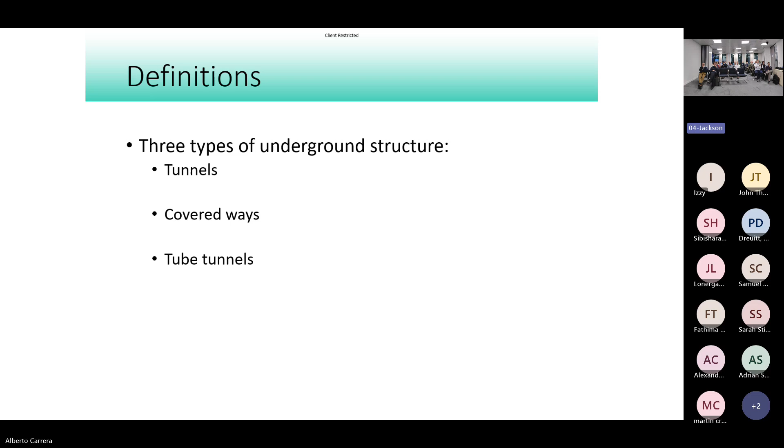There are also tunnels and covered ways that you'll find on the shallow tube - I'm not going to call it the tube, it's the underground for those bits. They're not tube tunnels, I don't care if they call it the tube as their brand, I'm going to be engineering correct here. We've got 3 types: tunnels just below the ground that have been bored, mined out without disturbing the surface. The majority of the subsurface parts of the underground - the Met, Hammersmith and City, Circle and District lines - are built as covered ways, which I'll explain again in a moment. And then the rest is tube tunnels, deep level circular tunnels, mostly cut out of London's clay.

So here's where it all began, back to 1825. Marc Brunel, father of Isambard Kingdom Brunel, who probably eclipsed him to an extent, created the very first tunnelling shield. This was used to create the Thames Tunnel, which is now part of the London Overground between Wapping and Rotherhithe stations. He had been imprisoned for debt, and while in prison, he saw a shipworm eating through a piece of wood. The shipworm, Teredo navalis, has two hard shells on its head that it uses to rasp a hole in the wood, and it gave him an idea that if you could support the clay or material you're tunnelling through continuously, you could construct a tunnel through ground you wouldn't normally be able to build through.

His solution was this tunnelling shield. It doesn't look much like the tunnelling shields we use to build tube tunnels today - firstly, it's rectangular, and it's a little bit ad hoc. Basically it consists of 36 cells, 3 rows of 12, each one containing a miner, and each an independent iron frame. They all fit together in this big rectangular block. At the front, you can see lots of wooden boards - on the right-hand edge, these boards hold back the tunnel face. Each miner is standing in there, lit possibly by a candle, but not much more than that. You look at this drawing and think it's really clear to see, but they couldn't see what they were doing, really.

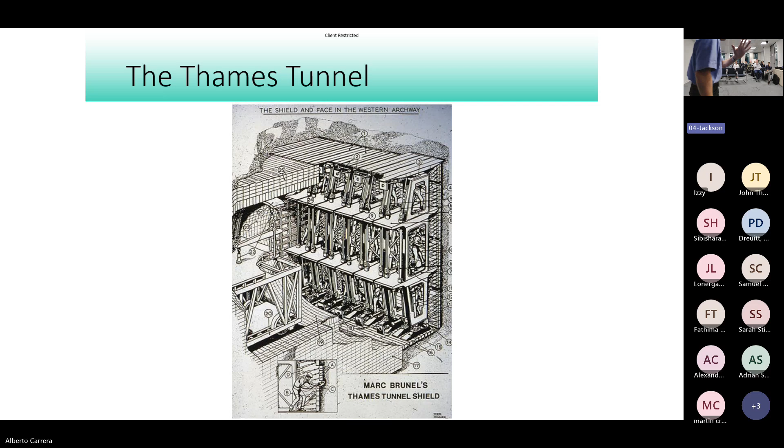The next type of tunnel is the covered ways, like the Met and Hammersmith City lines. The first one was designed to link Paddington Station, which was fairly remote from the rest of London, with Farringdon. That line, now the northern part of the Circle Line, is a combination of tunnels—some bored through, particularly around Clerkenwell, some open cut, and some built as covered ways.

Most people think you take your street, clear all the people out of it, dig a great big hole, and put a railway in it. You just keep building it along. Now you've got a hole, so you stick the tracks in, build the tunnel invert, build the crown of the tunnel nice and arched for strength, backfill, put the road back, and now you have a tunnel. It's not that easy, though that's what a lot of books will tell you.

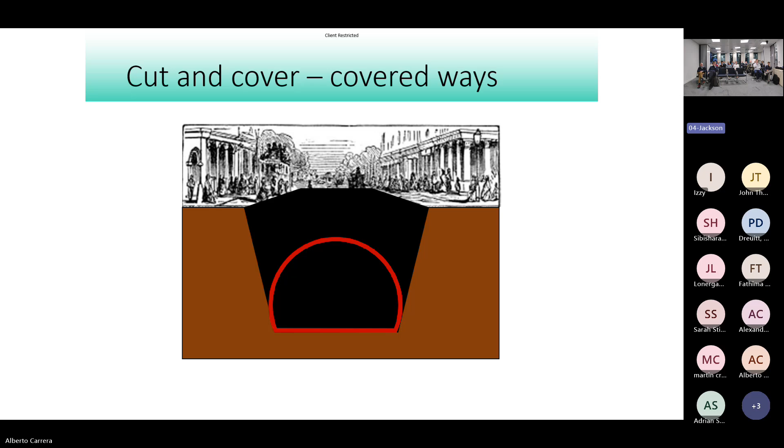There's a big problem, and that's what's in the subsoil. Most of London's streets, particularly the New Road—the combination of Euston and Marylebone roads we have today—already had stuff underneath: a pneumatic dispatch company tube for blowing posts through, gas and water pipes, and most importantly a huge great sewer in the middle. If you dig a hole in the road and rip all that out, there's a lot of grumpy people in the houses either side who've had their gas cut off so they can't cook, their water supply cut off, and their ability to drain sewage away cut off.

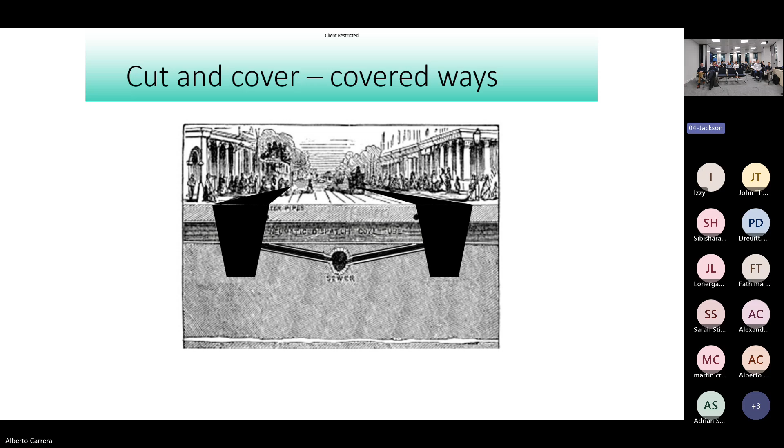Actually, it's rather more complicated than that. What you had to do is dig up the pavements on both sides and put a great big trench in, building it along as far as needed. You then built a new sewer or pair of sewers and plumbed it all in, connecting it without being able to tell people to stop using the drains—this was done while people were still using them. You're now left with a redundant bit of sewer in the middle. You dig a big hole in the road, and then construct a railway tunnel.

One of the problems on that bit of line is they didn't actually bother building a tunnel invert. They just dug down to the soil, put some footings in at the bottom, stuck a drain in, added some hardcore, and built a railway on top. This means the tunnel can shift around a little bit, which is fine as long as you don't run big, heavy metal things through it at speed that might shake it. That's the problem—so a load of those tunnels have had to have remedial work done on them over time.

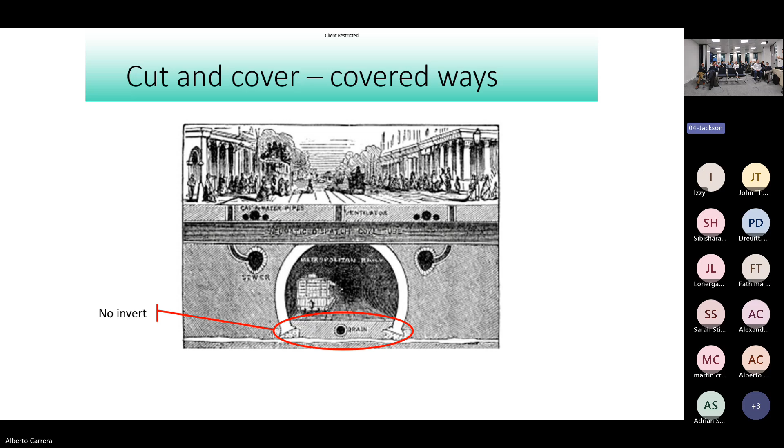So that's all about the covered way tunnels—it's really quite interesting, I get really into all this stuff. What I'm going to tell you about now is building a tube railway. At its simplest, this is how you build one. This is a tunnelling shield.

The idea for this came about after the completion of the Thames Tunnel. A different engineer, Peter Barlow, was building the Lambeth Bridge, sinking piles into the river that were cutting through the clay. The idea came to him: if he turned it round 90 degrees and pushed it through the clay horizontally, he could make a tunnel that vehicles and people could pass through. With a pupil of his, a South African named James Henry Greathead, he put together the idea for this tunnelling shield. It's really very simple.

This is part of the end view of it, and this is a side cross section. Effectively, it's a fairly short steel cylinder. Imagine taking a food can and just cutting the ends off it. You're left with a circle of metal.

That's obviously going to be a bit flexible and squidgy, particularly if you've got lots of clay pressing around it. So what you do is put a big partition through the middle of it, which has got a square or rectangular hole in it. That gives it its structural rigidity.

At this end, you put some adjustable steel cutters. Effectively, they're just like a circular blade around the edge of it. Then you fit into the back end of it—it's a bit thicker than just the equivalent of a steel can, but here you've got a bit of structure, and it's labelled on this diagram as a hydraulic press, but the original one was a screw jack.

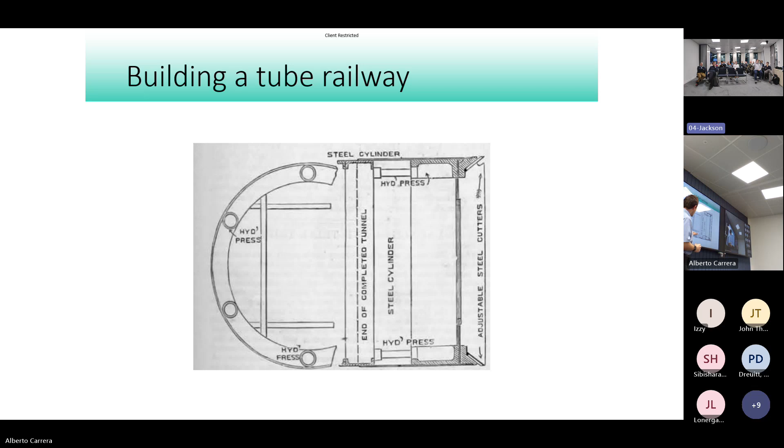So the first one of these, I'm skipping over the Tower subway. The first one was a tiny little tunnel that was built between roughly the Tower of London and these days where the More London development is, where the old City Hall used to be. It's very small. The only bit of it you can still see is a cylindrical yellow brick box on the Tower of London side of the Thames that says London Hydraulic Power Company on it. That tunnel was built underneath.

It had a very tiny 12-person carriage that could be pushed back and forth using a rope. This was before Tower Bridge existed, so people would pay a penny to travel through. There were two classes of travel, first and second. You paid 2p if you were first class. It didn't give you a better seat or anywhere different to sit. It meant you queue jumped the people who had paid their penny.

It lasted until Tower Bridge opened, and then that was closed down, because why would you want to descend a staircase and then go through a very narrow tunnel? They'd removed the wagon by this point, so everyone had to walk through. It was lit by naked gas flames coming out of a pipe with holes in it down the wall. Teenagers used to go down there and would run along, knocking out all the gas flames, leaving everyone in the pitch dark. They got sentenced to hard labour for that.

So the first real one is the City and South London Railway, which is now part of the City branch of the Northern Line. This was built as a twin tube railway, so we're starting to see the evolution of the principles of the London Underground forming here. It's a twin tube railway, so they built one tunnel for each direction. It was originally going to run from Elephant and Castle to the City, which was a really stupid idea, because no one ever needed to commute between those two places, because the people who lived at Elephant and Castle were not city workers. It was a fairly run-down area even at that time.

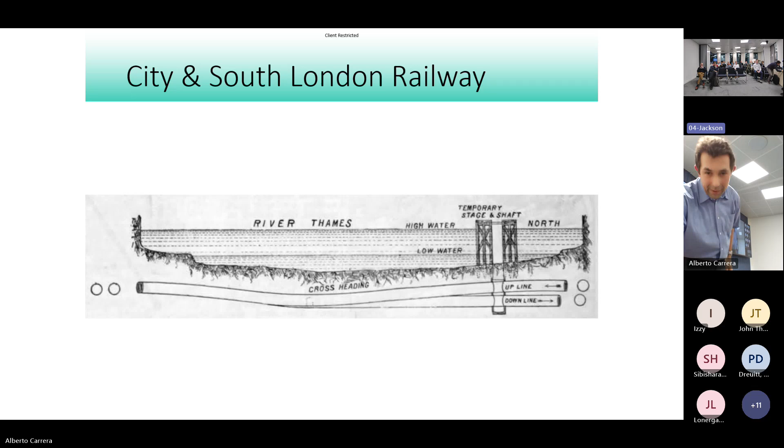The other reason for this is that if you look at the map, here's the shaft. The shaft is just there. This is the staging they put up. Here is Swan Lane and Arthur Street.

So Arthur Street goes around a really nice 90-degree curve, fantastic for railways. I'm sure, particularly as the track engineering people, you'll know just how good it is to start sending trains around 90-degree curves. Swan Lane is really narrow. So you want to keep your tunnels under that, you have to stack them. There's no way you can put two side by side under it.

So you build your two tunnels. Here you've got the station, so you've got one big tunnel, two platforms and a single track in between, spiral staircase and a lift going down to it. You really don't want to make this too deep. And it's okay because a cable's going to pull the car along. So it doesn't matter that you've built the curve, the track here in a tunnel that goes around a 90-degree curve up a 1 in 14 gradient.

It made it really difficult to get the trains in here because the cable company went bust in 1888, two years before the line was due to go live.

And the directors went, I know, electricity, that will sort the problem out. There are no power stations in London at this time. So they had to go and build pretty much London's first power station to power the line. They've got to develop the technology of the electric train.

So they went to a company called Mather & Platt in Manchester, who put their best engineers onto it and developed a series of trains. They look like two upright pianos back to back with live contactors in them, pulling three carriages through the tunnels. The tunnels here are 10'2" in diameter, which is notably smaller than the current London Underground. And you've now got to try and get one of these trains being powered at 550 volts through this tunnel, up a 1 in 14 gradient, round a 90-degree bend into a platform and stop dead.

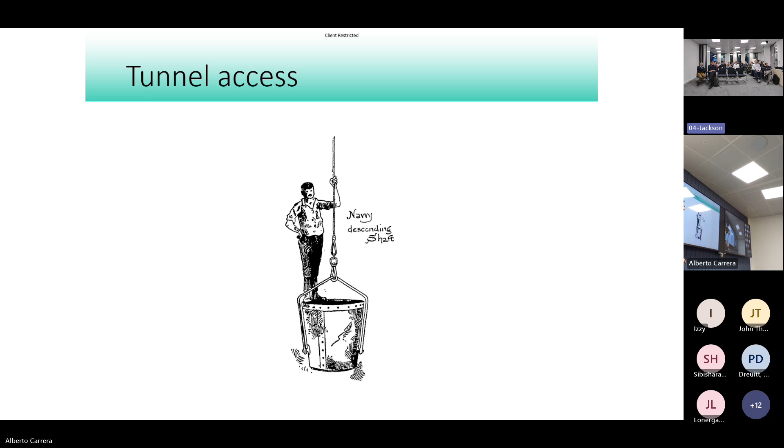How do you build a railway in tunnels, underground, following the line of the streets perfectly, when it's down there and you're 50, 100 feet above it? I'm not going to dwell on this because it's all maths and trigonometry, and it's the evening now, we probably don't want to be doing that.

But basically, down the road where you want to map your railway, you'd send a team of people along at night who'd put little brass pegs into the road directly above the centre line of the tunnels that would be going along. Then they would measure the distance between each pair of pegs for a tunnel and the angle using a theodolite. So you'd have everything mapped out perfectly on the plans.

And when you have your shaft, you then put a structure across that's 90 degrees to the line of the railway. You hang two plumb lines down it, sitting in a tub of oil or water at the bottom to damp them. You then transfer the measurement across so you know how far it is from here to the first peg and here to the second peg. So you transfer those across.

You then know what angle you want, what bearing you want to be going off, and how far you want to tunnel at that angle.

And then once you've got that far, there's the course correction you've got to do. What they did, they actually had course correction rulers put along the side of the tunnel. So you'd know that if your tunnel was trying to go around a particular radius bend, you'd have the inside ruler and the outside ruler marked the same way, but actually different lengths in and of themselves. As long as you were sticking with the same line on both sides, you'd be gently going around the corner. But you've also got to worry about the vertical curves as well. It was amazing this actually worked.

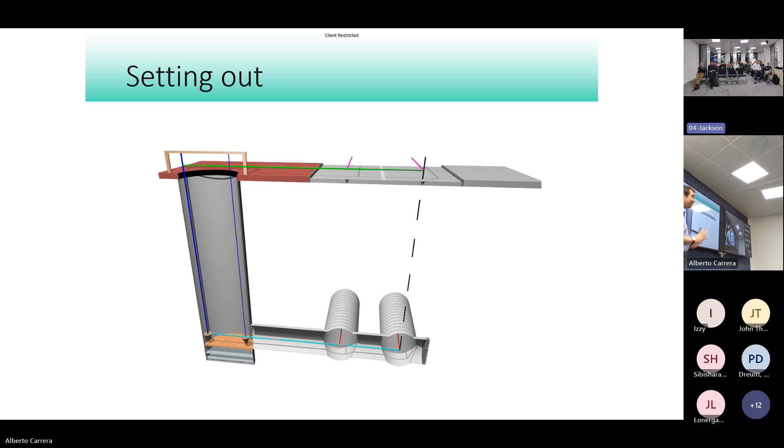So the next railway to be built was the Waterloo and City, but I sort of skipped over that - that was a reasonably straightforward railway to build. It also wasn't really part of the London Underground initially. It was built by the London and South Western, who ran their trains into the mainline terminus at Waterloo, and said, our trains, like Paddington, are all coming in quite a way out of the city where people want to work.

Paddington now has a metropolitan railway bringing people through its tunnels into the city. We can't build that because we've got the Thames in the way, so we'll build an underground railway. So they built their little railway, and that's why the Waterloo and City line only has 2 stations. Effectively, it's an express extension of the South West Railway coming in to get people into the City of London.

Central London Railway was the next, this is almost the first proper tube. It was able to learn from the mistakes made by the City and South London. It built bigger tunnels, pretty much the same size as the tube today - we're now up to 11'6" in diameter. It didn't put in stupid gradients, didn't put in stupid curves, mostly because it followed a really sensible line, pretty much east-west, all the way from Shepherd's Bush, underneath the line of Bayswater Road, Oxford Street, High Holborn, Cheapside, all the way through into the city, stopping at Bank.

There's a few wiggles in there, a few narrow bits. So if you've ever used Notting Hill Gate, Chancery Lane, or St Paul's stations, you'll realise the platforms are slightly one above the other. That's just because the road narrows there, and it means they can fit them in without having to buy the property either side.

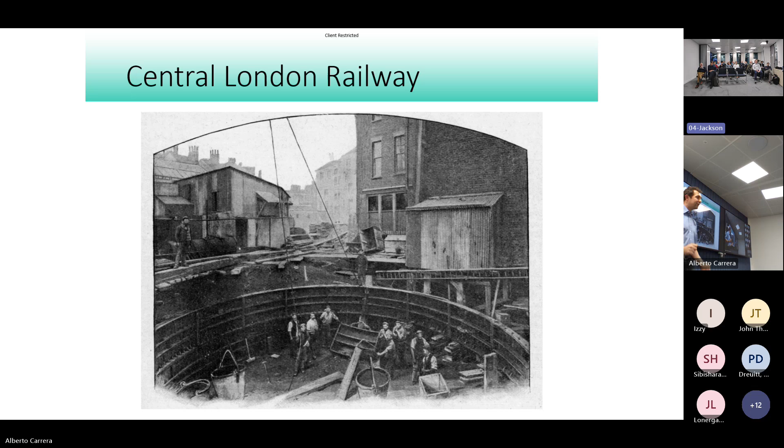So how do you get started with this? Well, this is Marble Arch Station, and this is a plan of it. So we've got two shafts for lifts, a shaft for a spiral staircase. Almost a legal requirement from the start was that you had to have separate entry and exit stairways to keep the flows of passengers separate.

As you can see here, you build this shaft first of all, you sink that one down, and then you build a small heading off to where you want your first platform to be. You build a little chamber here, big enough to erect one of those tunnelling shields in for a running tunnel, and then you just tunnel that one out to the end here and start building it along the tunnelling line. It doesn't matter that this is diagonal, because all the bit around it will be dismantled to create the platform later on.

Once this has been done, you can enlarge this piece here, the large shield chamber, and put in a great big tunnelling shield, about 25 feet in diameter, and then drive that back the other way to create the platform. Sometimes they would build the running tunnel along to the right point, build the large shield chamber, tunnel the platform, and then just drag the small running tunnel shield through and start that off at the other end.

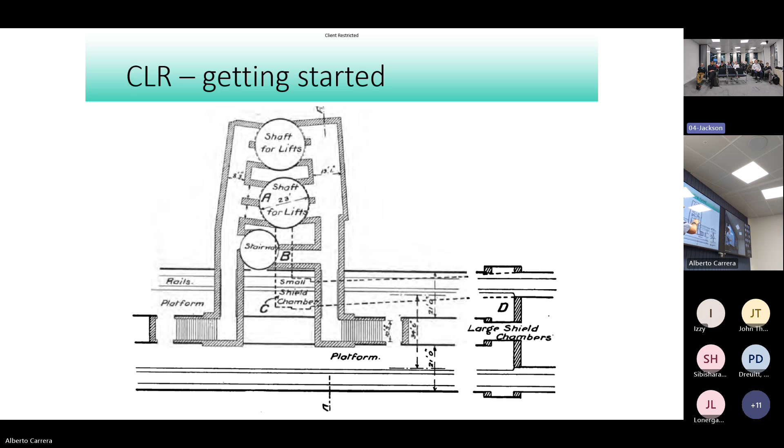Other times they would just keep running tunnels going along, and then they'd build the new tunnel around it, dismantling it as it went.

The CLR was interested in automating stuff where it could, and it used this amazing thing called the Thompson excavator, which is basically like a dredger on this great big platform. So they'd be laying rails in the tunnel. You have this great big platform here and an endless chain with buckets on it that would scrape away through the front - the tunnelling shield is here - scraping away through the front, all of the clay.

This amazing gearing on here is an automated way of moving the barrel. So you've got a rope here that can lift it, and there's also, if you look at it the other way, one that can slew it from side to side. Once you set it going, it would basically work its way up and down the tunnel, just sliding across. It's almost like watching a dot matrix printer at work.

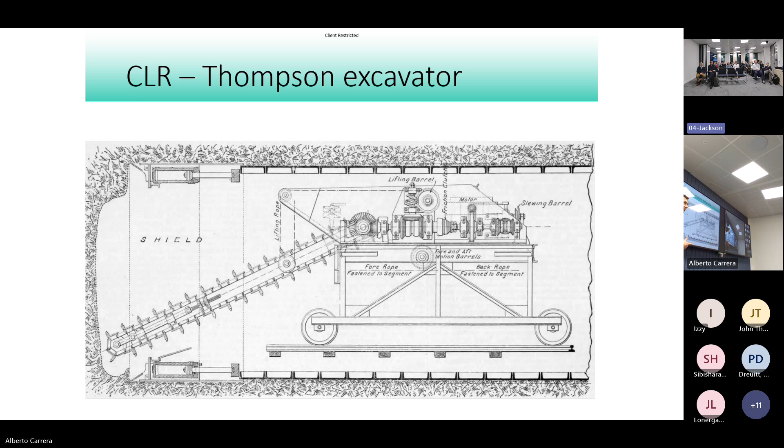It would just work its way back and forth across, scraping out all of the clay. It would dump it here, and this framework is wide enough that you can build another railway in between. So this is on broad gauge track. You build a standard gauge or even a narrow gauge track underneath that you put your spoil wagons on, and the clay would just be dropped into those, and it would then be hauled backwards and taken back to the shaft for removal. Looks like a really cool idea. Didn't work so well. It was reckoned that the rate of progress with this was the equivalent of people with pickaxes, because this broke down so often. But it was interesting nonetheless.

It also means in the 1930s, when you realise that you built the platforms shorter and you'd like to have longer trains, but it's a complete pain to extend them, you've now got a piece of platform on a 1 in 30, which is against regulations. So you then end up having to dig out chunks of the tunnel roof and end up with elliptical tunnels to try and squeeze a platform in that's not too slopey. So if you've been on the Central Line recently, if you go to one end of each platform you'll find a slightly different profile to the rest of it, and you can usually see a junction, and that's what the problem is. That's an extension of about one car long.

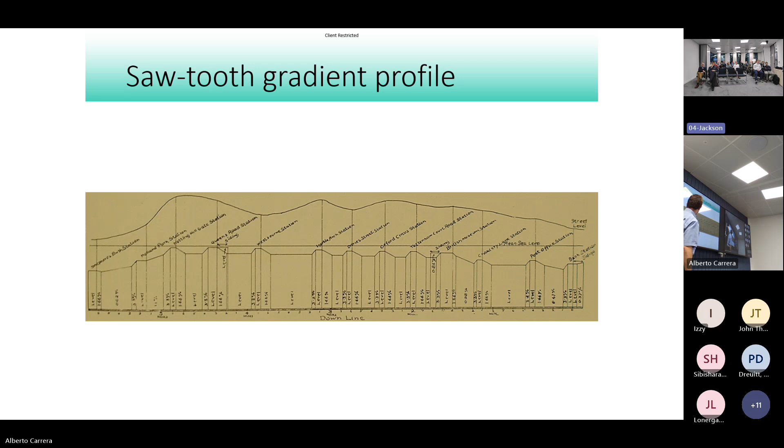There's a couple of bits here you'll see. These are the sidings, one at British Museum, one at Queensway. There is actually one at Marble Arch, which for some reason isn't shown here. Sidings were always built on the level for fairly obvious reasons. You don't want stuff either accelerating itself out of your siding or into the dead end at the end of the siding.

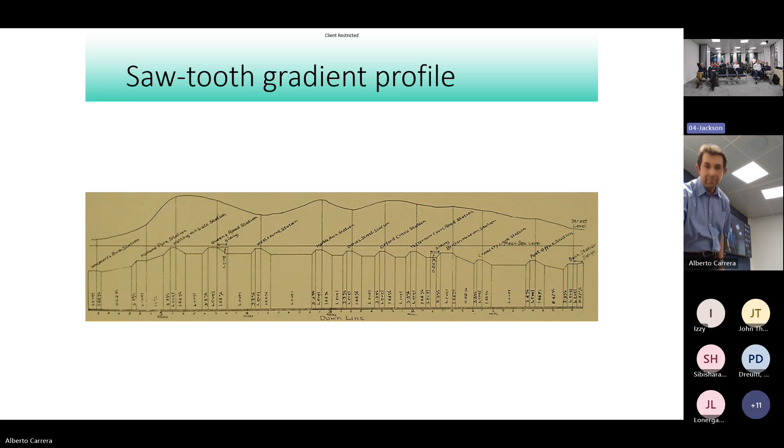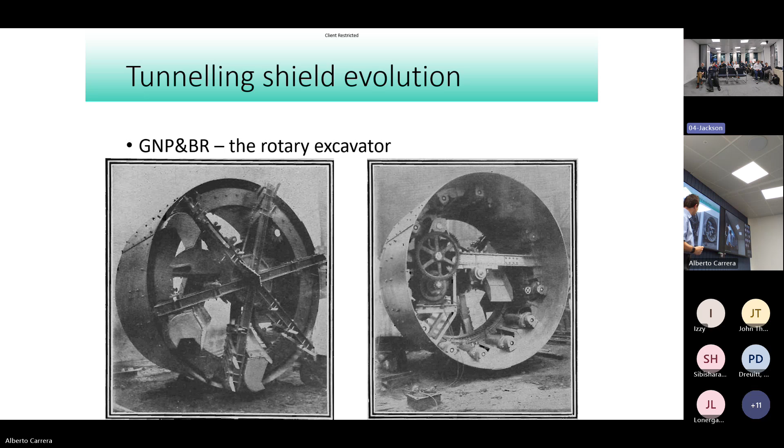They were all bought up by an American financier in the early years of the 20th century. They'd all been approved by Parliament but couldn't raise the finance. This guy with the wonderful name of Charles Tyson Yerkes raised the money, mostly in the US, and was able to get these three railways built. He built them to a common standard.

Traditionally, in tube railways, you put the sleepers across the tunnel rings at the bottom. You've got a curved tunnel, so the sleepers form a chord. You bolt the rails to them and leave the gap in between. They would put some boards along because they realised if you needed to evacuate a train in the tunnel, you wanted somewhere for people to walk. But usually that was just half the width, and the other half, if you fell into it, well, bad luck.

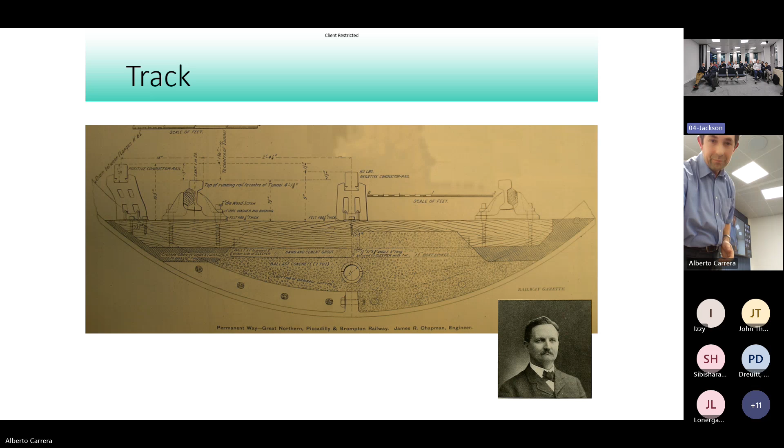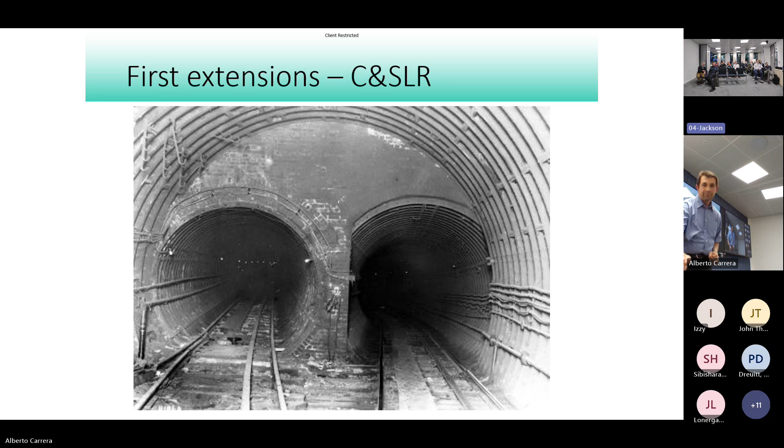That's a picture of what one looks like. You can see it's a series of steps moving out, so you go from one running tunnel to two running tunnels.

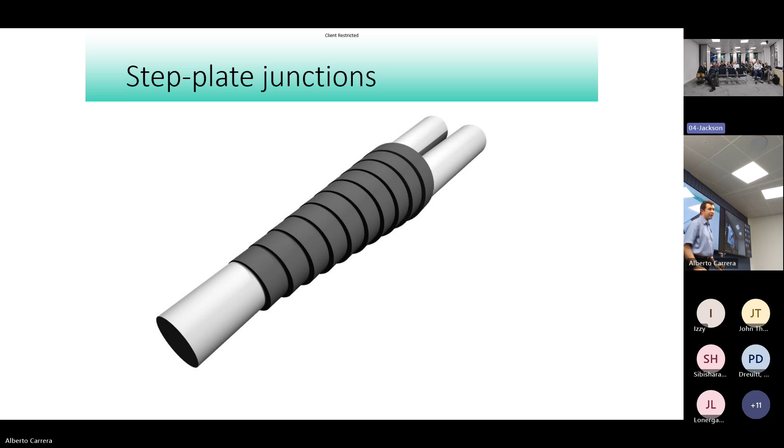You know, we build mines into hillsides and down shafts and spread out to get the coal—how do we do that? Well, we drop ponies down there and build stables underneath, and the ponies live their lives down there as the motive force for moving the wagons around. Building a tube railway, well, you're just mining clay—you don't want the clay, you want the space left by the clay. But you might as well use ponies. There's no stables down there; you just lower them down at the beginning of each shift and lift them out again, with a couple of straps underneath them, pulling them up and down on the cranes.

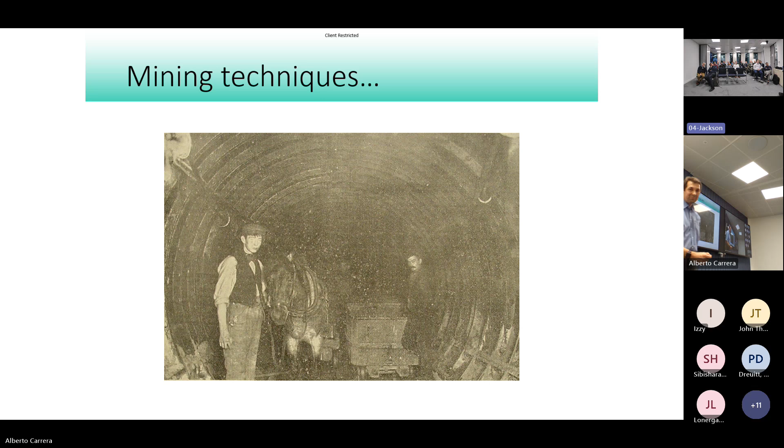I mentioned that the City and South London Railway was built with tunnels 10 feet 2 in diameter, really tiny. It's not quite the case. Some of it was built at 10 foot 2, the piece from King William Street in the City down to Elephant and Castle. The extension they built in parallel down to Stockwell was built to 10 foot 6. But this was still too small. All the other railways were now at somewhere between 11 foot 6 and 11 foot 10, and this made it a complete anomaly.

By 1913, all the railways were under the control of the same company, with the exception of the Metropolitan Railway and the Great Northern City Railway out of Moorgate, which is actually part of Network Rail these days. All the rest were now run by the same company, running the City and South London Railway with these tiny trains where you'd have to go for custom rolling stock if you wanted to change anything, which is always expensive. And you can't fit so many people through it. So what do you do? You make it bigger.

So in 1913, they got permission to enlarge it. Then the First World War came along, so they didn't do anything. And it took until 1922 before they got enough money to start enlarging it.

Part of it was closed down, and they just dismantled it ring by ring, dug out the clay around it and put bigger rings in. Part of it, from Moorgate down to Stockwell, they decided they'd keep the trains running while they enlarged it.

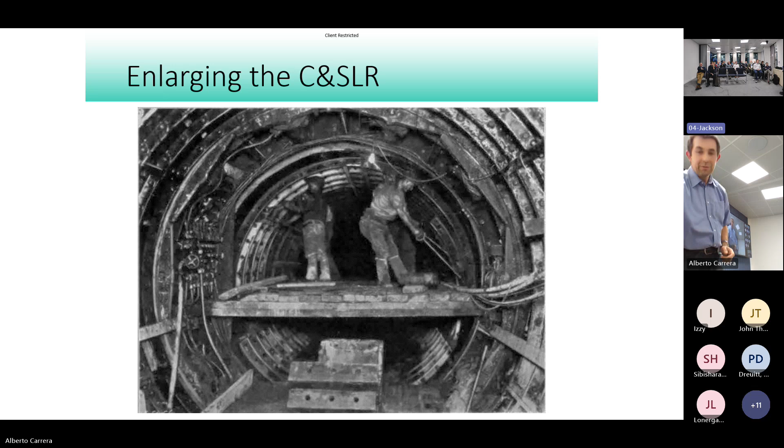Now, when you rebuild the tunnel, you've taken out segments for a tunnel 10 feet 6 in diameter, and now you've got a tunnel 11 foot 8 in diameter. Do you take in a complete ring of new tunnelling segments? Of course you don't. What you do is take in a handful of small tunnelling segments, and you end up with a really weird shaped tunnel, daisy shaped or slightly odd like that. This worked tolerably well for a short time.

Near Stockwell, the ground's horrible. It took the original company longer than expected to build the tunnel to reach Stockwell station because of the amount of water and gravel in the ground. They ended up having to seal the tunnel off and pressurise it with compressed air to get the work done, and the compressed air would hold the water back. To do this work, they built 2 new crossover tunnels between Oval and Stockwell so they could use single line working and close off sections of the tunnel at a time, compress them, enlarge them, and then reopen them and reroute the single line working.

It worked for about a month, possibly not even quite a month. The tunnelling shield, moving along with the track, and the trains going through it, obviously not quite at the same time—at the end of each night, they'd go and prop the roof up with some boards and let the trains go through. Trains are big, heavy, vibrating things. The boards shook loose one day. The train is running through, and there's a bang from the back of the train, and the board is knocked out, and the back end of the train is covered with gravel pouring down with a lot of water. The driver has the presence of mind to accelerate the train through, stop, check with the conductor what's going on—looks like the tunnel's collapsed, right, let's move on to the next station then, that might be safer. But they then realised maybe this wasn't the best idea, and closed the whole line down for rebuilding.

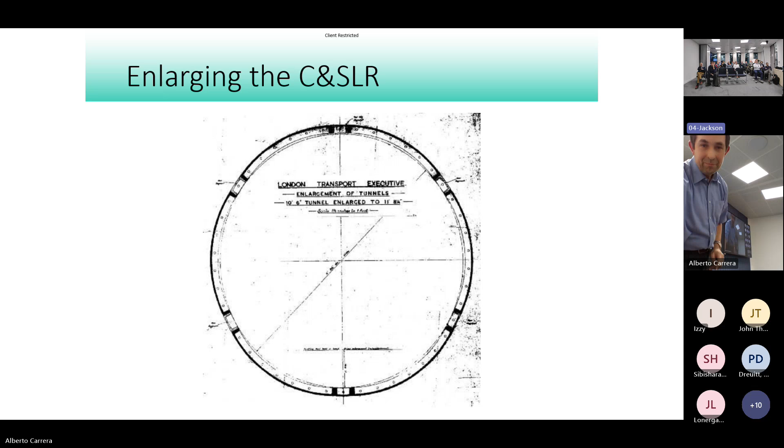Also in the 1920s, they wanted to rebuild a lot of the stations with escalators, because lifts move a lot of people in one go. If you turn up at the right time in a station and the lift is about to go, it's quite quick to get down to the platform. If you turn up just after the lift's gone, it's really quite slow. If you've got escalators, you can move people down at a constant rate.

They did have connecting passageways down below with tiny little ticket offices in them, because if you changed trains from one line to the other, you'd have to rebook onto your new line. But now they've had to put in escalators, and you're starting to see the complexity that Oxford Circus exhibits to this day. Oxford Circus was rebuilt partly before it even opened, because the original layout, as planned, fell foul of Board of Trade regulations, who went, this is just a complete mess. We need some changes. So they ended up having to fill in tunnels they'd already built and make a few different connections. This now became even more complicated.

The first two escalators were put into the Bakerloo line, and they ended up having to reroute some of the passages and build avoiding passages. Then they put in escalators a little later down to the Central line, where they couldn't drop them into the normal position between the platforms. So they ended up above the platform, going out into an escalator chamber where people then go sideways into stairs that lead down.

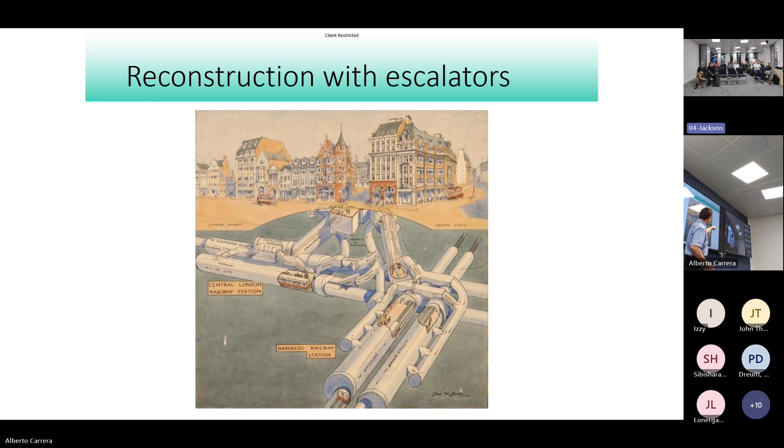A lot of that was reused with the escalators being put in as well. So this is now even more complicated because we now have the Victoria line running either side here. We have far more escalators. We have the ticket hall underneath Oxford Circus. It's an absolute warren under there.

So the Victoria line didn't use Greathead shields mostly. There are some bits, like under Green Park, I think, that were built using Greathead shields because it's wet and gunky under there. They developed a new piece of technology.

This was developed by Kinnear Moodie, the drum digger. This is a great big rotating device. Crudely, it's like having two tin cans, one slightly larger than the other, that interlock, and one of them contains motors that spin the other one round very slowly, and it's got lots of really hard cutting teeth on the edge. This is effectively a forerunner of today's tunnel boring machines.

There's some quite cool kit there. And as with a lot of this technology, these days, if you look at who builds tunnel boring machines, you've got Herrenknecht in Germany, Kawasaki in Japan, Lovat in Canada, and Robbins, an American company who builds them. There aren't actually any British companies who build them, but the technology is all British. We designed and developed it and then didn't invest in it, and other countries have taken the lead in all of it. Usual story.

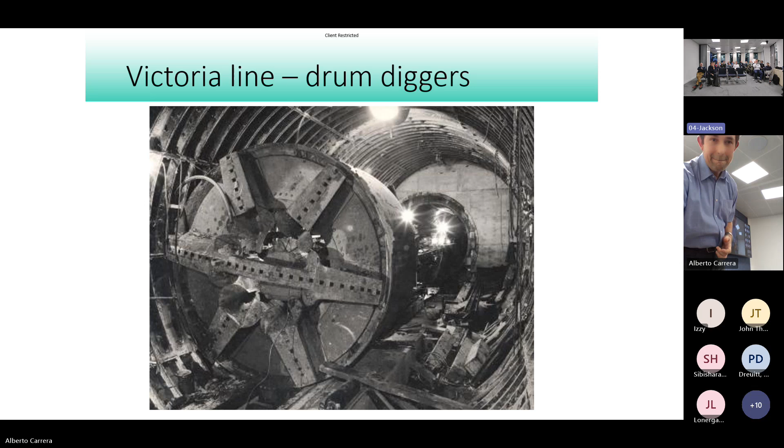Sorry, squashed my writing a bit there. The tunnel lining for the Victoria line is not the same as on the other lines. So they wanted to make some changes.

In the Second World War, we started using concrete tunnel linings because cast iron was all being used to make boats and bombs and things like that. So London Underground pioneered the use of concrete running tunnels, and a load of the Central line extensions built during the Second World War used concrete tunnel linings.

The Victoria line used a new type of concrete tunnel lining with curved ends. The idea was that rather than fitting them together and bolting them like the concrete used in the war - big, heavy linings needing huge bolts holding the flanges together - there's no flanges inside here. You just press these out against the clay, and the clay presses back and locks it all together using these convex and concave ends.

It also means that because this is far thinner than even the cast iron linings, you build a smaller tunnel through the clay to get the same size running tunnel inside. Although that said, the internal diameter of the Victoria line is about 12'6" rather than 12 foot or even slightly less on the other lines - they deliberately made it slightly bigger.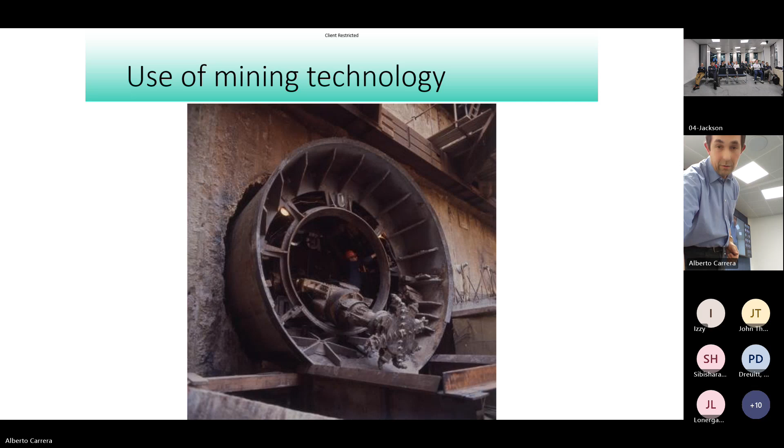The Jubilee Line extension was the first instance of proper tunnel boring machine technology being used for the London Underground. I can't remember which station that was at - funny feeling that might be North Greenwich. It's one of the great big box stations where they dug simply an enormous hole in the ground. The station at North Greenwich is big enough to lower the entire tower from Canary Wharf in on its side - it's terrifyingly big. It's actually got a provision for a junction at the end in case the Jubilee Line was ever extended to Thamesmead, so it's longer than it actually needs to be for the station.

TBMs that were built in segments - this is, I think, the front segment that gets lowered in, and then you fit other pieces in behind it. So you've got the hydraulic drive for it, and facilities for the workers on board now - they've got toilets, a kitchen, a mess room. Because the idea is you're down there for 24 hours driving the tunnel through, so you're not expecting your staff to sit there for 12 hours driving a tunnel boring machine, which probably isn't the most exciting driving experience.

Although, completely aside, you can actually buy a tunnel boring machine simulator game.

That's really odd. But anyway, so the staff on there can be driving the machine, and they can go back and swap over, take a break, go to the loo, get themselves a drink. There's also a lot of stuff on the back of these - it's only when you start thinking how do these work that you realise they've got to have a huge extension reel on the back, because as they're moving forward, you've got to be laying out the power cable, otherwise the plug's going to come out of the socket at the other end. You've also got all the pipes bringing in a lot.

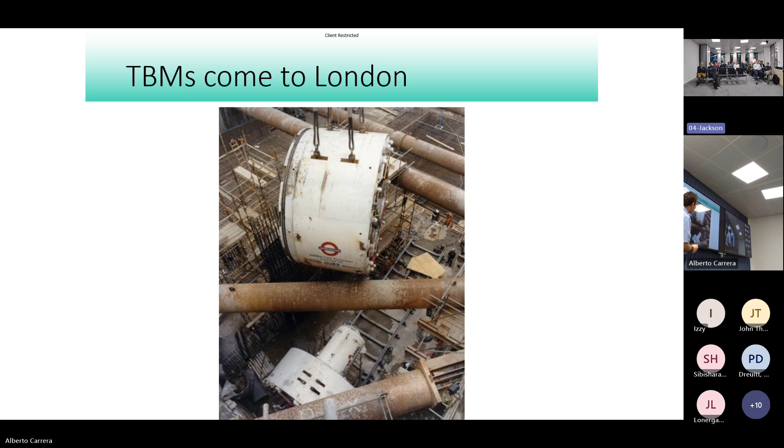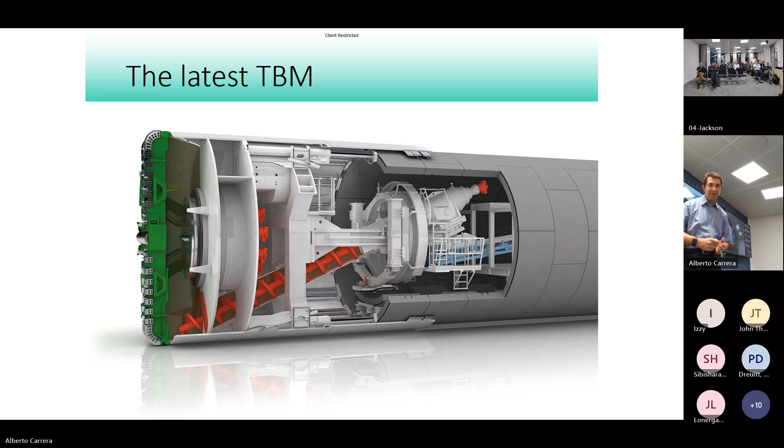So I mentioned the Battersea extension a few times - I was a bit cheeky. Ferrovial, who built this, contacted me after I'd written my last book and said, can we interview you for a podcast? Can we do a series of podcasts about interesting projects we've been involved in? I said, yeah, of course, I love talking about this stuff, as you've probably noticed. I went and had a good chat to them. They said, we're really sorry we can't pay you for this. I said, I don't want any money, but can I have a tour of your tunnels, please? They said, oh, yeah, that's fine. You can't buy experience like that - you may well go down tunnels and things in the course of your job, but I don't.

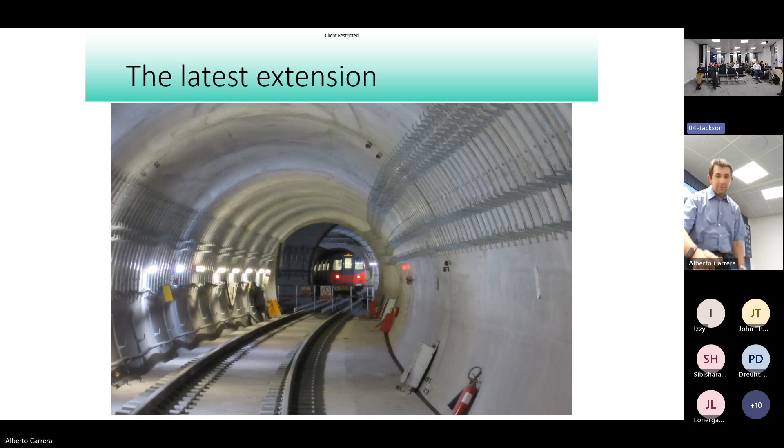And I think that's it. That was a bit of a whistle-stop tour of how they built the deep level tubes.

I'm not trying to flog my book because it's out now, out of print, so you can find it on eBay and secondhand bookshops and things like that if you're interested and you feel you haven't heard enough from me this evening. That is sort of the civil engineering history of the London Underground, right from Brunel's Under River Tunnel all the way up to Crossrail. It's lots of technical detail because I like technical detail. But that's it, so thank you very much.